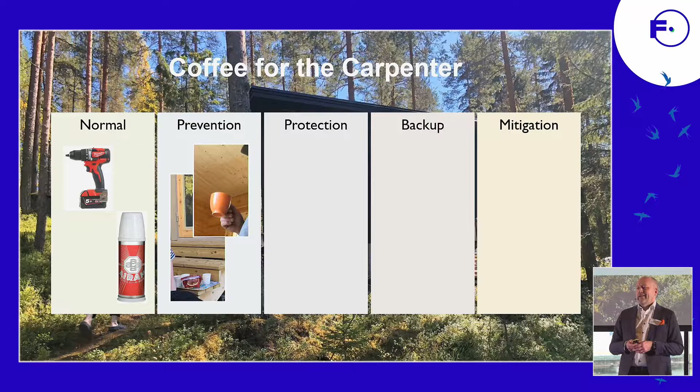So let's start with the normal operation. Jykke likes to bring his own coffee. He's pouring things, he's doing things there and so on, and he drinks it from his own thermos bottle. Perhaps once per 10 days it runs out. What do we do then? Well, we as a family, we prepare some coffee. We are mostly there, at least 9 out of 10 days during summertime. So we make coffee. Of course, then we are dependent on our own coffee machine, in addition to us being there. And we are also dependent on the electric grid. So some of them might actually fail. Let's say 1 out of 10 days, Jykke runs out of coffee, and then with a factor of 10 lower, 1 out of 100 days, we are actually perhaps not there, or the grid is out. Well, grid is pretty good in Finland. Hope it stays like that.

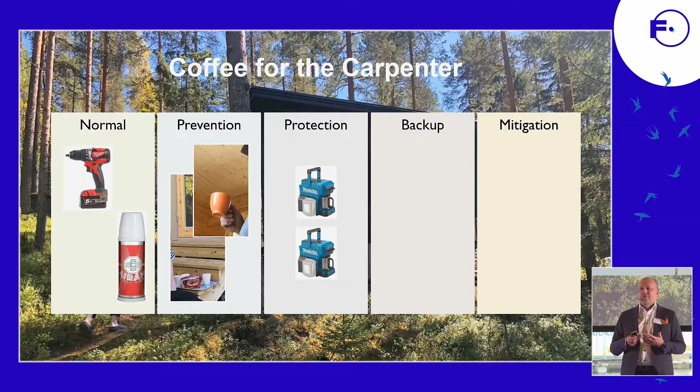Then we need protection. That's really the safety. Well, here I propose that we buy 2 battery-driven coffee machines. So that's an example. We will decrease the probability of losing coffee with one more factor of 100 or even 1,000. So we are getting down to 10,000 days or 100,000 days. We are getting safer, we are getting better. Well, somebody might say these are standby systems, we don't use them normally. And it might accidentally be such a situation we try to start them up, they don't work. Even if we have actually 1 extra there to fulfill so-called single failure criteria.

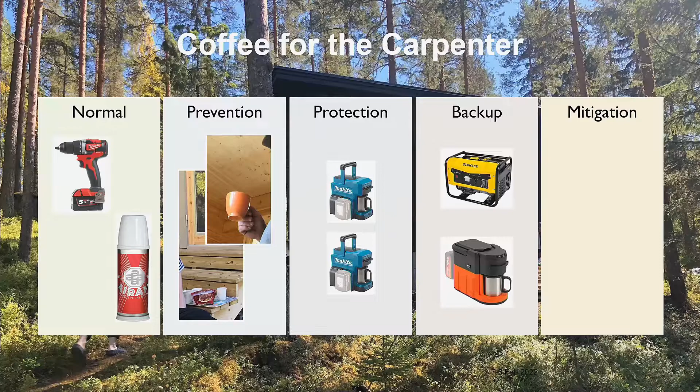For that we need a backup. We might need an aggregate to load those batteries if the grid has been gone for a long time, or we might actually have a diverse battery-driven coffee machine. Okay, everybody would like to have a passive system here. Probably X300 is not for this mission, but I call X300 easier for me to pronounce. Sorry, GE Hitachi, BWRX-300. So that's, we bring with a factor of 10 more.

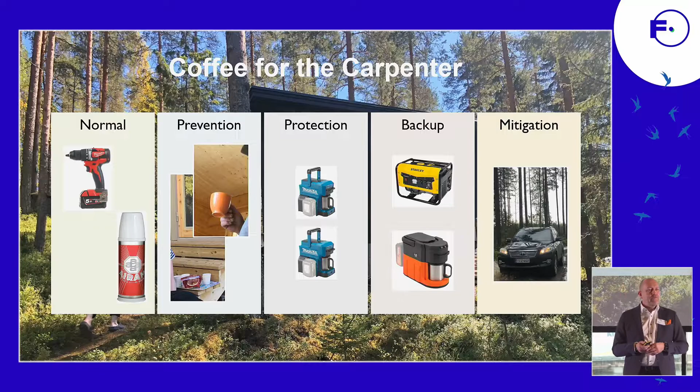In this case, we have a very good situation because even if these would actually not work, our carpenter could drive to Mikkeli, to the town, and have his coffee there. So we come down to once per million days, we lose the coffee. And if even the coffee was not available in the market, we might shift to tea, actually. Well, Jykke wouldn't like it. But this is defense in depth. This is the way we build safety, actually, in nuclear power plants. In reactor circumstances, we don't talk about days, we talk about years. So we're basically driving the modern reactors so that any bad situation would happen much less than even once per million years.

Design is good because this even allows some human errors. We check everything very carefully all the time so that they don't really influence any of these devices, but if they do, we always have the next level of defense.

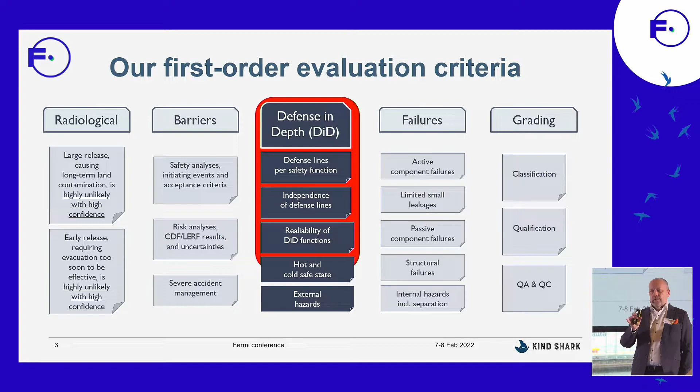On the right-hand side, you see failures. Sometimes the devil is in the detail, because some special failure modes in one line might affect the next one. As I said, for example, the grid or some dependency could influence both the normal coffee thing or the backup thing. That's why we study them.

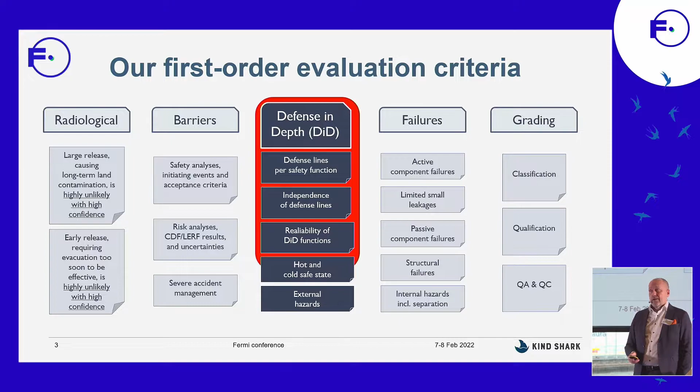And on the right-hand side, of course, there are very good strategies here by GE Hitachi of quality assuring those deliveries in accordance with the importance of different parts of the plant. So this is the way we evaluate with our team. And next I'm going to run through the reactor in a simplistic manner. How do we actually study the reactor?

Reactors are more simple, but often we make safety quite complex. And I believe we have to actually try to make even that quite simple, because in that way we focus on essential things. Let's start going through that. So this is a fast course from our team to everybody on X300 safety features.

And first there is reactivity and shutdown. In order to handle any situation, you first have to shut down the chain reaction. Then you have to make sure that the reactor pressure doesn't go over, because some heat is being generated all the time. Then you also have to, in the midterm, actually cool the reactor, so that you don't lose the water by steam or leakage, so you are still cooling the reactor.

Critical break isolation means that you may have some places where it's very critical to isolate, to shut those places if a pipeline breaks, for example. And in this reactor, there is a very innovative solution for that. Radioactivity confinement means that then we also check out that these barriers will work. So I will run through these 5.

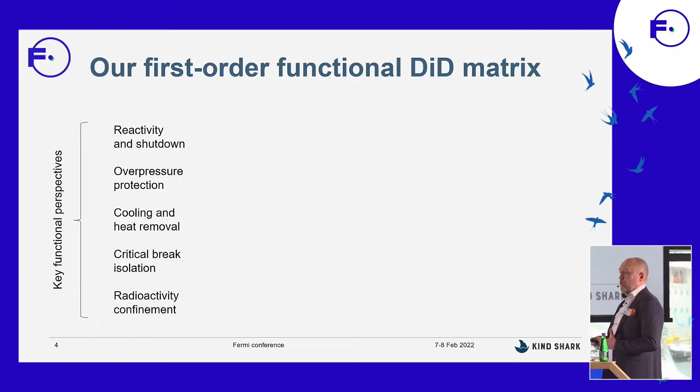I'm not going to go through all the details, but I try to run through these things and form an architectural view of the plant. What kind of features are there to make it practically eliminated that we end up in a disaster? First, normal things. You can see things like rods. You are using control rods to steer the nuclear power. For reactivity, of course, you have other control systems like feed water control as well.

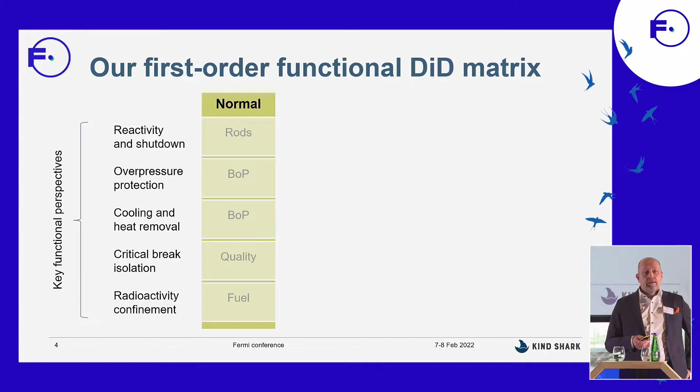BOP stands for balance of plant, which means that the pressure is being taken care of by the turbine side, not the reactor in itself. Cooling also, we get the heat to the sea or to the air or to the turbine condenser. You see critical break isolation is not there, but the quality assurance is so high that it's very unlikely that we have substantial defects in those pipelines or the physical barriers. And then the radioactivity is basically almost completely kept inside the fuel. That's what we call normal operations.

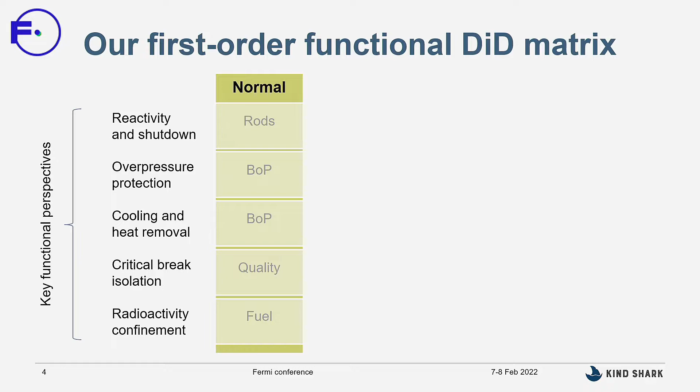Some of these might go wrong. It might be any of them. But for example, it might be that there is some problem with the plant on the turbine side. You see, anticipatory means that, for example, you could see very early that something is going wrong on the turbine side. And that signal comes in, and you may utilize that to actually try to re-steer things.

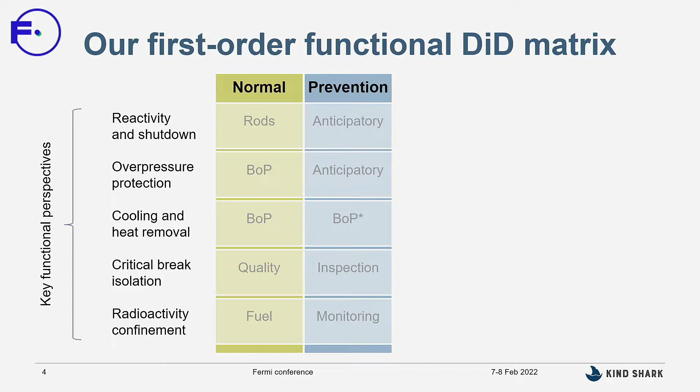You see on the critical break isolation, before we have a break, you need to have a defect in the material, and then you need to miss it by inspecting. We are regularly inspecting the plant, and the more critical places, we are inspecting more regularly, more frequently. And then we are monitoring the plant.

Sometimes in a new plant, it may happen that in the first cycle, you, for example, get some fuel leakages, and you are monitoring that. And then you decide what to do about it, whether you shut down the plant or whether you can live with that minor leakage. And even in operating plants, we sometimes have leakages from the fuel. Very minor, but still important. And of course, the plant is designed to actually filter out or clean those leakages. This is the preventive line.

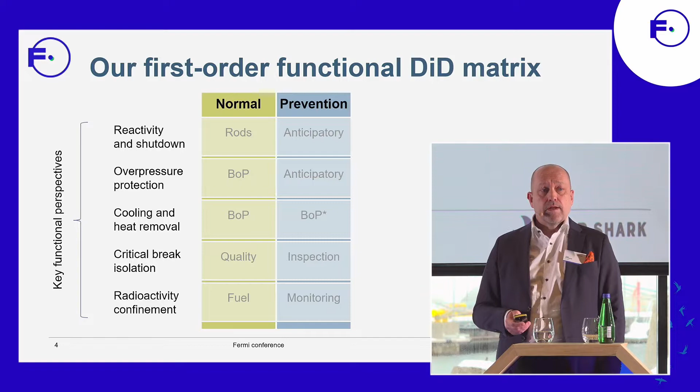Then we come to something that is called really safety, some standby systems. And for that, the BWRX-300 has quite many passive features. For the reactor shutdown, it means that we actually see that we need to shut down the reactor, and we pneumatically cause a hydraulic insertion of the control rods. So some valves are opened, and the rods go in, and they shut down the nuclear reaction.

Then we have passive features, the so-called isolation condenser, which nicely regulates the pressure, but also provides the cooling of the reactor. After opening valves, it passively does that.

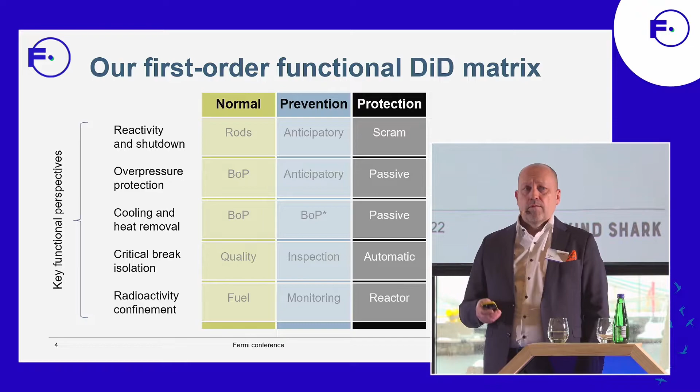Critical break isolation: there are particular isolation solutions here, which isolate, for example, big lines directly close to the reactor vessel, so that it is very highly unlikely, if not completely ruled out, that you would actually have any bigger leakages from the reactor, which is a very unique feature, and part of the reasons why this reactor is so much simplified from the predecessors.

Reactor circuit: when you are cooling it by the isolation condenser, you are not getting steam or anything out from the reactor, which means that if there was some little leakage there, it would be contained inside the reactor circuit.

Now we are on the protection. We use the color black there, like the black belt. This is the part of the plant that you typically try to make absolutely sure of, and this is where the licensing is mostly focused. And this is an area where you try to be as simple as possible, often also as passive as possible, to really show that this is not complex. And you also make sure that this functions for a long time without any human intervention.

In general, this defense in depth also prevents human errors from having a big impact. But it also makes it such that the operators are trained to do a lot for the normal operation, but they are not forced to do anything when really needed in an accident situation. They are actually often trained absolutely not to do anything, because in some accidents that we have had in the past, Kalle was asking about those in the break, it's often been so that some mistakes are made.

In this black side, you actually believe very much in automation. And you try not to intervene, because otherwise you might actually make a mistake. So even those things are part of this defense in depth strategy: how do you see the role of the operator?

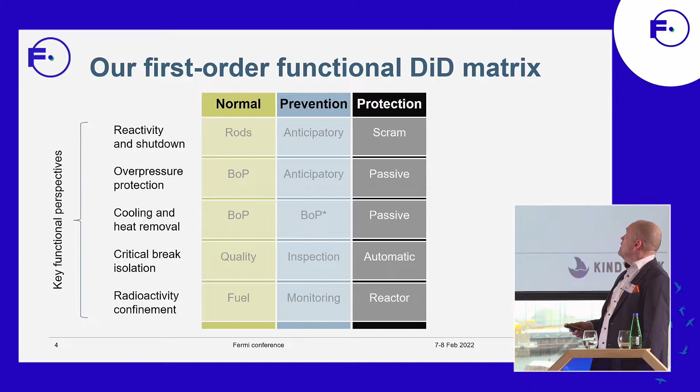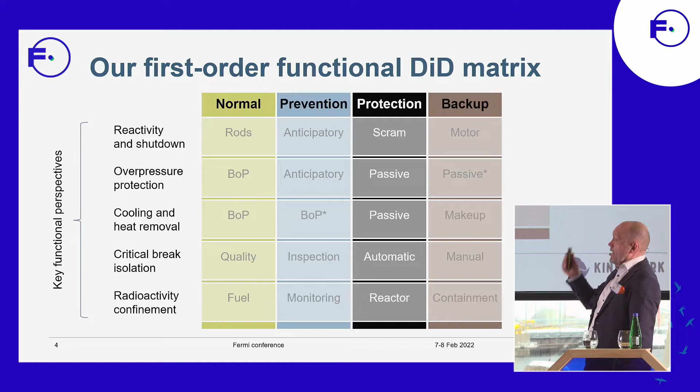Then if even that black, which is the best black belt area, would not work out, you often have some backups. For the control rods, you have a motor. After you have done the hydraulic scram, the motors are slowly pushing the control rods in. So they are backup. You see passive with an asterisk there. It means that there are two different valve types that actually activate the passive system.

Because the other part of the structure is just a structure. So there are two valves, one red valve, one blue valve, for example. Then we are studying this a little bit. This is very much language that we are using here. GE doesn't use exactly this language.

We try to form our view, and our team is quite experienced in boiling water reactors because Sweden and Finland have them. Myself, for example, I've been a lead engineer on boiling water reactors and even on a full I&C modernization. So we know quite a lot. And one of the Swedish boiling water reactors, even the first one, had an isolation condenser. That plant is not working anymore, but still.

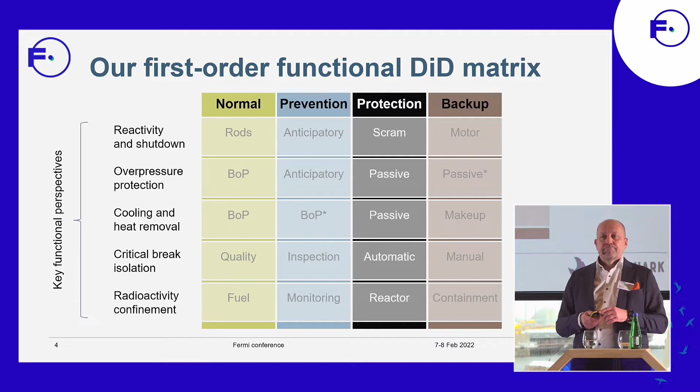There might be some manual. We are studying a little bit. Is there a manual possibility to close if the isolation doesn't work? And then we always have the containment to really close up everything if something was leaking even from the reactor circuit. I believe that things have to be basically quite simple.

And it's nice if the team, especially the technical side, learns it from the top down: how does this really work? Because then you know how important different parts of the plant are. We often forget that, and we put a lot of requirements on some single component or thing that is difficult to qualify, and we lose time, and we might lose the schedule in the project. And that's often a mistake.

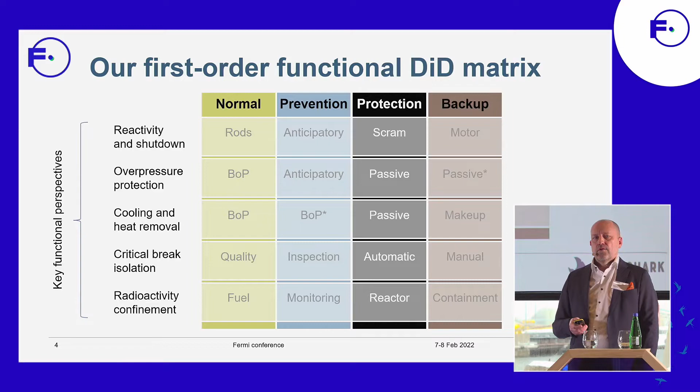And in many modern projects, people don't see this big picture, and we use a lot of time on some single thing, although for the big context, it's actually not a headache, because nuclear safety is not built by relying on single components. It's actually built on a good systems architecture of the plant. What comes after this if this would fail? Even the containment couldn't sustain if the chain reaction kept going.

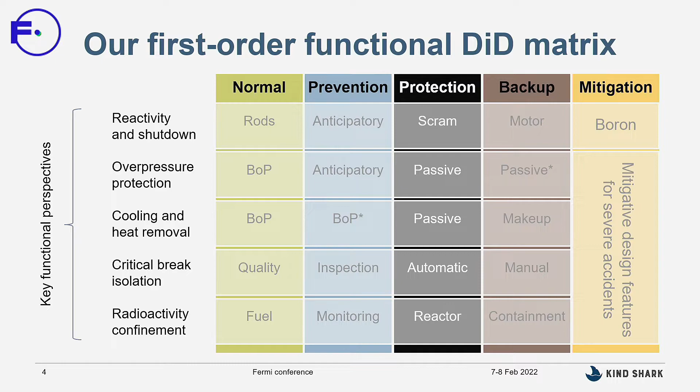And if there was a problem with the control rods, that they just don't go in, not with hydraulics, not with the motor, there is a boron injection. So you inject boron into the water of the reactor to shut down the reactor. That's not normally used in boiling water reactors, you use that in pressurized water reactors. But here it is a backup system. So it's your last line of defense.

And then on the right-hand side, we are studying what kind of features in the plant would help us handle a situation where even the core would melt down, to really make sure that the containment can still sustain all those phenomena happening inside the containment. Sweden originally, already in 1980, started preparing these kinds of things after Three Mile Island, and especially after Chernobyl, things were sped up also in Finland and many other countries, and we built dedicated systems.

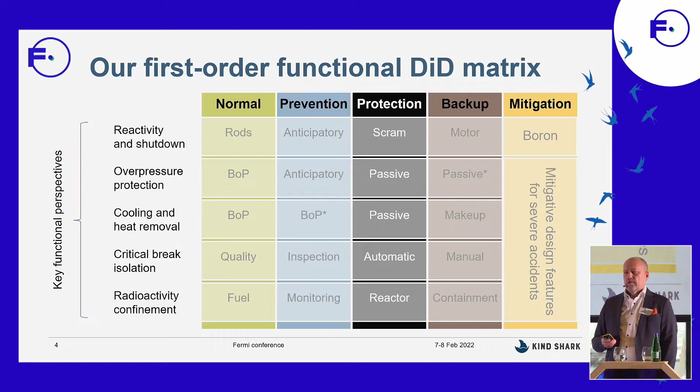Here we are studying how that situation is handled. We know this reactor is a little bit smaller, but it's not a tiny reactor. It's still a considerable size, so we are studying that. We are very happy to see the development of the design that we have seen here. And here is a slide, just a disclaimer: not official stuff, still in the middle of the work.

Very happy to see the development of the design. GE has done a lot to simplify things. We don't currently see any big headaches, but we are studying. We try to be critical because we are trying to make sure that also in our home market, Fermi, as the power company, would actually be able to stand behind the design. And this is a pilot project.

We look forward to using the same methodology for different designs. So this is our first pilot, but as Kalev explained, this is going first now, and let's see what other designs we might evaluate. Here are six things that we think are particular here, and of course GE knows that even better than us. The isolation of these bigger line breaks so that you don't really have to treat the large LOCA with the containment, for example, or the cooling system.

How do you manage the small LOCAs where you're using passive systems, the isolation condenser and the containment cooling system? They come next. They are not really such novel things, like this isolation condenser. It's about condensing steam, and that's not really new to us. But we are taking a look at how that is made really reliable. And there can sometimes be some devils in the details.

It might be that there are some isolation functions that, if started inadvertently without reason, might actually close those systems. You have to go through it carefully—I often say DID, defense in depth, is also DID: devil in detail. You have to go through certain things because we know the regulators will fundamentally also do that.

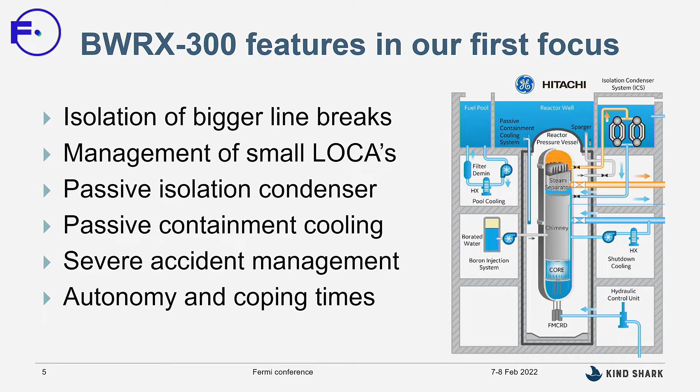So we are doing that now. Severe accident management, as I already mentioned. And then a huge thing here: autonomy of the plant. Not just the first situation after a disturbance, where the operator doesn't have to act, but how much time can we take without, for example, any external grid. The typical time nowadays is 72 hours, 3 days, but the designers have told us they try to stretch it for a week, which is fantastic.

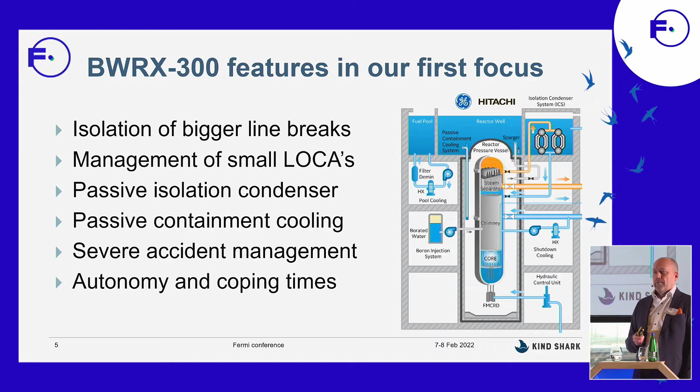We are also looking at things like how long the batteries will sustain. We don't need batteries to be safe, but we need batteries to be able to monitor the plant. And we always have to remember that safety is a feeling based on facts. The monitoring creates you some feeling, because safety is a feeling based on facts.

Risks are often very fact-based, but safety is a feeling based on facts. That's why, when we say we want something to be highly unlikely with high confidence, this defense in depth is crucial, and also that we are studying all the possibilities. And that we are also able to monitor the situation if we would end up in a difficult situation.

This is what we are doing. Happy to answer any questions. Thank you.